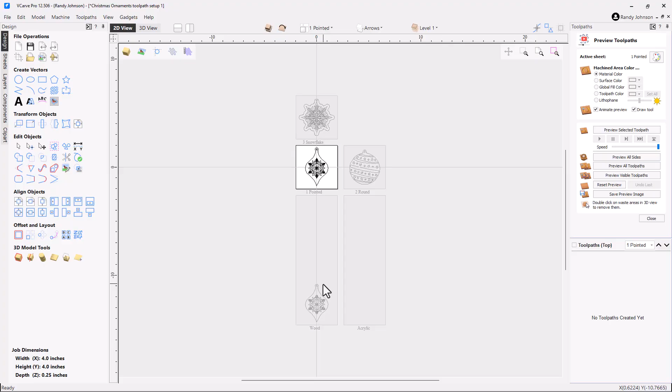Now I'm going to take and move this one to the top of the design area. I'm going to grab it, and over here in the move tool section, I'm going to use the absolute setting, the center of it, and move it up to a positive 4 inches in the Y direction, which will put it right there at the top and position it nicely.

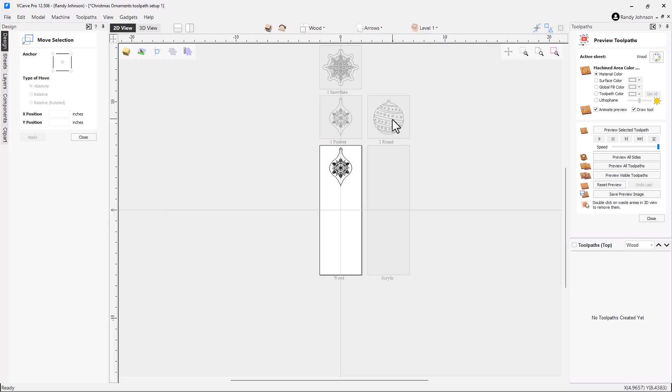I'll go to the round and basically do the same thing. Select it, right click, copy that to sheet wood, double click on the wood sheet to activate it, select that one, and let's move that up right to the middle.

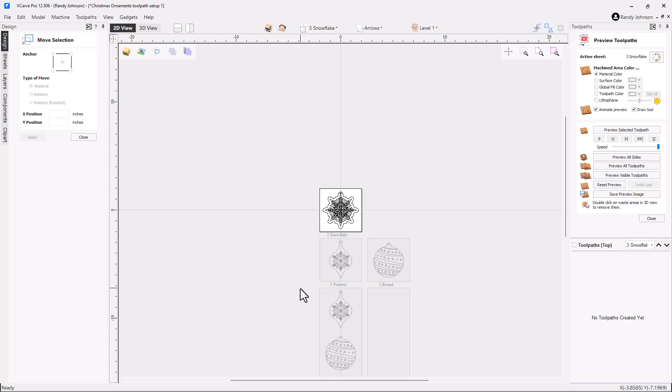0, 0 on that, and then the final one is the snowflake. We can again select it, copy to sheet wood, and now when we look here, we have all 3 of the ornaments lined up nicely on that new piece of material.

Close out of that. We're not going to need these 3 designs anymore. So I'm going to go to the sheet setup here, and let's activate the wood one by double clicking on it. That makes that active, and then we'll deselect and hide those 3.

Now the next thing, we're going to take and select those 3 ornaments, right click, copy those to sheet acrylic, and so we very quickly now have our design set up on our 2 sheets of material.

So the first thing we're going to do is set up on the V-carving, and then we've got to do a cutout as well as drill or route out a little hole here at the top.

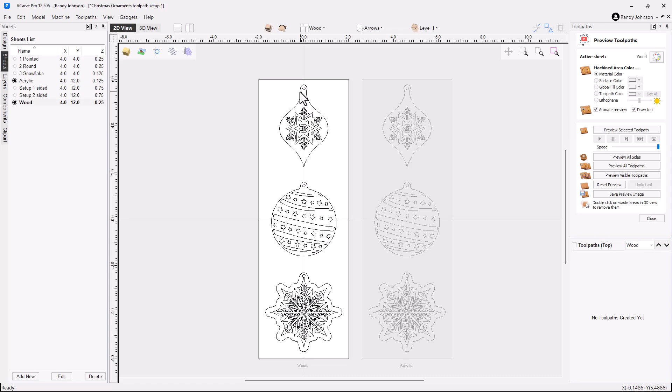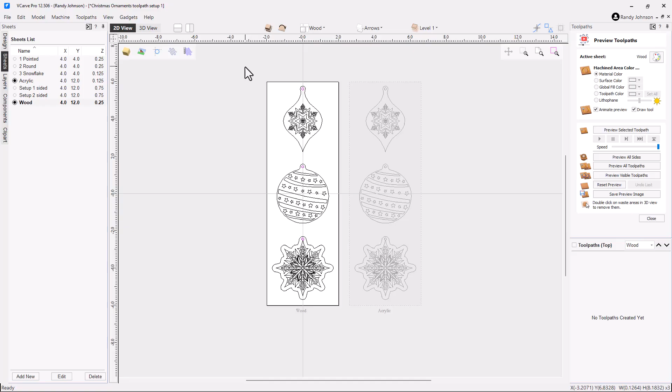So for that, I'm going to do a little bit of grouping first. I'm going to select the outsides like that, hit group, and then I'm going to select the little holes in the top for the hooks and group those as well. Then I could select everything and then just simply deselect those 2 groups, leaving me just with the VCarve designs that are left.

And then I can group those as well. The grouping just makes it easy when I start setting up my toolpaths. If I click on any part of the design, then everything is selected, and that way I don't leave anything behind.

So next up, we could go over to our toolpaths, and the first one we're going to set up, of course, will be the VCarve. So I'll go into VCarve, and go into my toolpath, get the bit that I want.

The bit I'm going to use for this is a 60-degree, but I'm cutting hardwood, so let's do this hardwood setup. That comes out to around 100 inches a minute on this, and 20,000, giving me a chip load of 0.005. It works out pretty well, so that one I found works well. If you have different settings you prefer, feel free to go with those. This is somewhat conservative - you could probably be more aggressive on the feed rate and maybe even pass depth, but I'm just setting these up as a moderate setting right now.

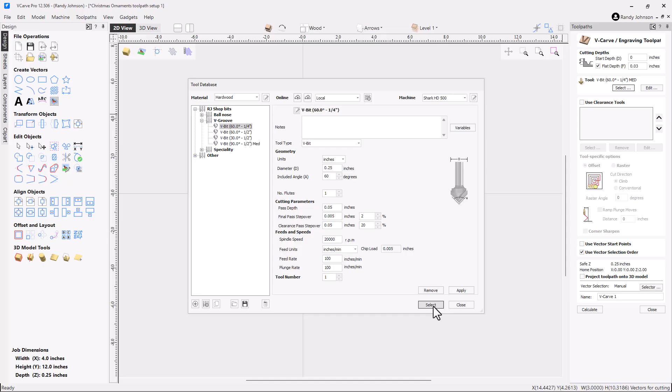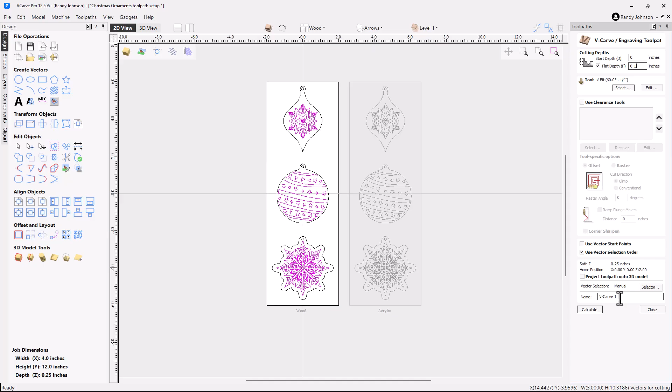So I'll select those. Now we see our V-bit listed there. Also, we're going to put a flat depth, and for the wood ornaments, we're going to go 1/10 of an inch deep, and we do not need a clearance bit on that. We'll go down through the bottom here. All the other settings are grayed out, so we won't use those. Let's set that up as a V-carve and click calculate.

Zoom in on that, and you can see it. Let's preview - and there's the design setup right there. Okay, so let's go back to the 2D view now.

And let's set up on the cutout. We'll do the hook hole next, so let's do the drilling toolpath on that. You could also route that hole out - that's another way that I do some of these, but the drilling toolpath works as well. Either one works. Cut this just a little below through the material.

We're going to 1/4 inch, so let's go 0.26. And then let's look here what I've got set up for 1/8 inch bits. Let's scroll up here. Okay, so let's go ahead and set this one up, copy this over.

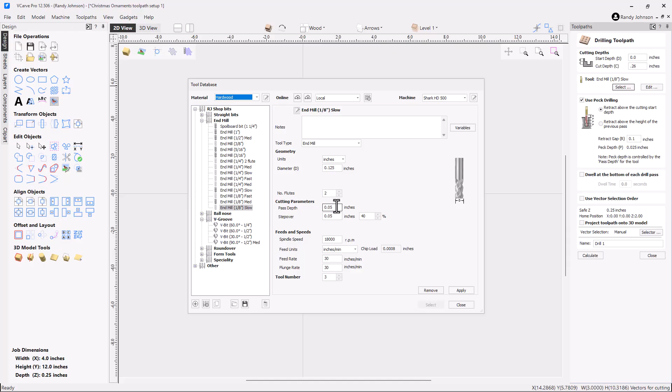I call this an end mill 1/8 inch slow, and that's because I'm using a slow feed to go down when I'm doing the drilling. The router speed looks fine, pass depth looks fine as well, so I'm going to apply that, select, and just check these other settings.

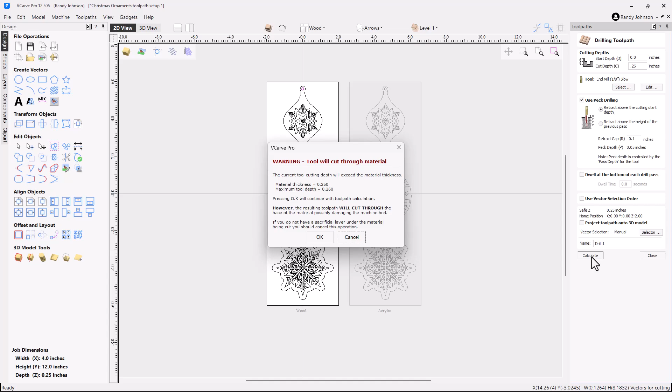We're going to retract above, use peck drilling, and we're going to come 1/10 of an inch above the material to get the chips out. Everything else looks fine here. So let's select our set of holes, hit calculate, and let's just preview that. That looks good. Next up, we'll take our profile toolpath.

Pretty straightforward - we'll select the outlines for all three of them. Now we're going to switch out, and let's go to our hardwood, and we want 1/8 inch fast. So let's set this one up for hardwood, copy this over and see how these settings look.

Okay, so let's actually take the medium. Let's see, okay, there we go - 100 inches a minute, 22,000. That looks good. Could probably slow this down to about 20,000 actually. Let's go with that. You can apply and select.

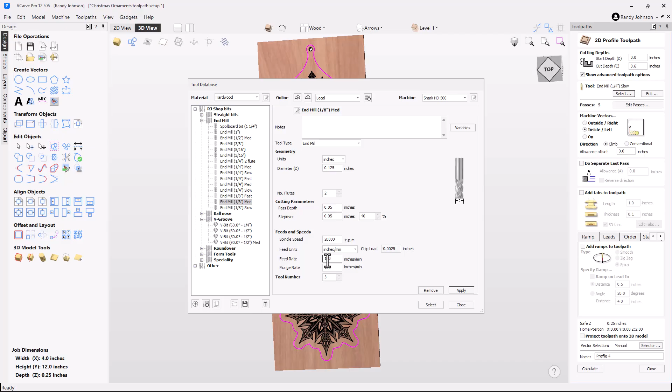Now, ranges in here on the spindle speed - you'll find that if you have the 2-horse spindle or even the 3-horse, using an 1/8 inch bit, cutting 0.05 deep, somewhere between 18 to 22,000 produces good results. And the feed rate, again, you could go anywhere from 80 to 180 inches a minute or even faster. On these small designs like this that are so tight on these corners and turns, especially the snowflake where it goes in and out, it's unlikely that the router or the feed will come up to the full feed speed anyway, because it has to slow down as it goes around those turns. So that's why I usually set it up somewhere kind of in the middle for a medium speed.

Put that just a little faster, apply, and select. Again, you might find you may be able to be a little more aggressive with your tool depending on your particular router bit and how you have your machine set up. But what I've shown there should get you going pretty well.

Now let's see the cut depth of this. We're going to go to 0.26 in the wood. Go to the outside, and let's add some tabs. Let's make this tab small, 1/4 of an inch, and 1/10 of an inch tall, 3D.

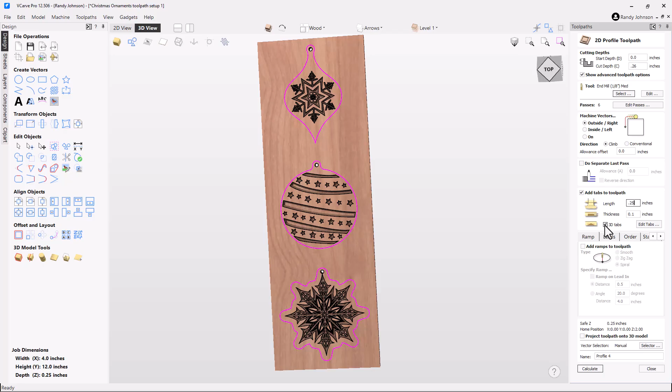That looks good. Let's edit the tabs - and we've got 4 tabs popping up. It kind of remembered from the last time I set it up, so that's convenient. I'll just stick with those 4 tabs on each of them. Close out of that. Let's add a little bit of ramp, smooth ramp.

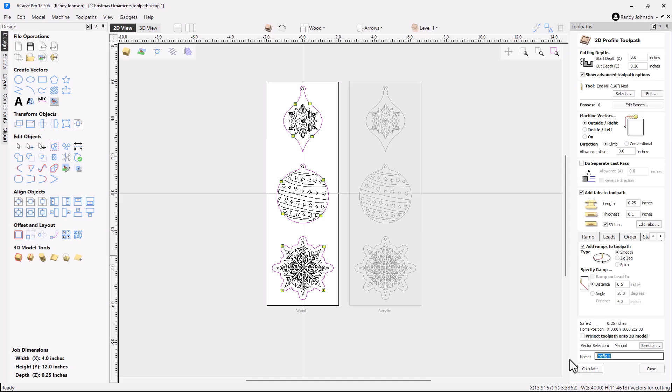That looks good. Just double check all these settings, and let's call this cutout. Calculate that - it's okay, preview that. And that does it for the wood ones. Now let's take and group these.

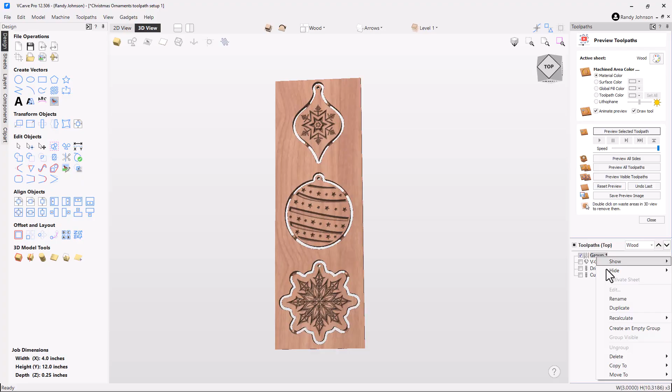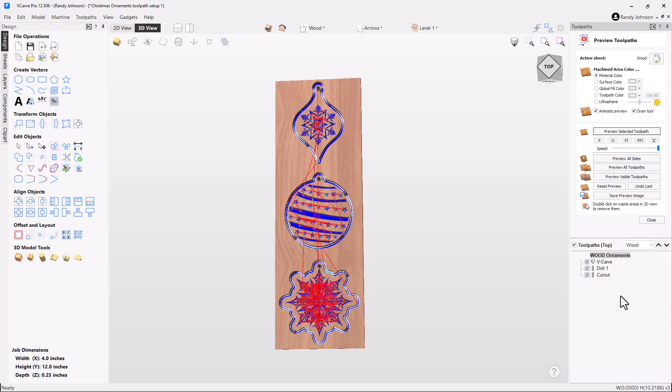Let me undo that a second and show you a trick. If I select all those, right click, group visible, it will do it automatically. Puts them all under a group. And then I'm going to rename that wood ornaments. So we have our toolpaths all set up for the wood ornaments.

Now let's go back to the 2D view a second. While we're doing all these toolpaths, let's do the acrylic ones next. If I double click on this, it'll open up. It's empty, but let's go back to the wood one. We spent some time setting all these up, so let's just right click and copy those to the acrylic setup.

Now we'll go into this one over here, and we can see everything about it's identical. So we're going to rename this acrylic ornaments. And then the V carving, it's red. All these are red because they're not associated with anything. But since we duplicated everything over, we should be able to do a quick association.

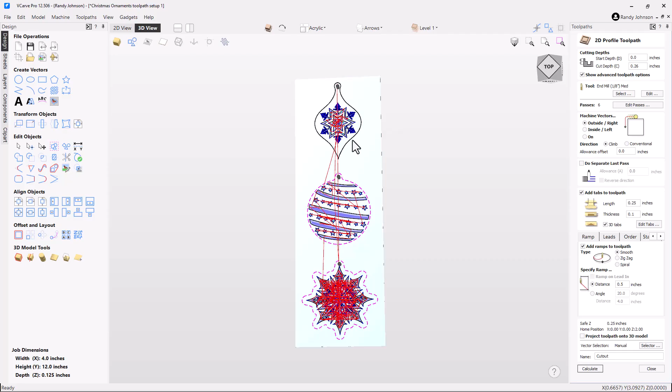I'm going to do the association first, just like, I guess these aren't grouped, so let's group those. Calculate. Drill. Hit the G key to group those. Calculate. And then the cutout, same thing. Now we're getting some warning messages, but I'm going to come back to that.

Our acrylic is only an 1/8 of an inch thick, and all these toolpaths were set up for the wood, which is thicker. So I just want to get everything associated, then I'll go back in, double click on the name here, and change the flat depth to 0.03. All we need to do is engrave fairly, actually let's make that 0.05, that'll work out just a little bit deeper.

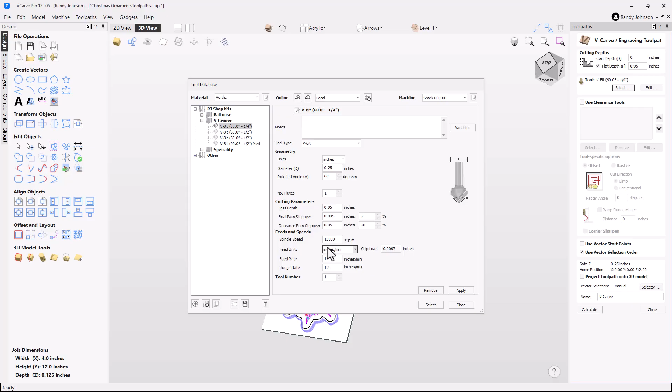I'm going to go back in here, and the speeds that I'd set up, you see it's under hardwood, and we can see the speed and feed down here on the settings. I'm going to change this out for acrylic. It'll still be the same bit, but you'll notice how I've slowed down my RPMs down a little bit. That's going to give a better chip load, keep the router bit a little cooler, and give a little better chip load in the plastic cutting. So let's apply that and select. Everything else looks good.

Calculate that out, and then we're going to go back to the drill. Here again, we need to make that drill a little shallower, so let's put that to 0.126. If we look in here, that's the hardwood settings, but actually if we go to acrylic, it's really the same settings, so either setup would work. Calculate that out, say OK.

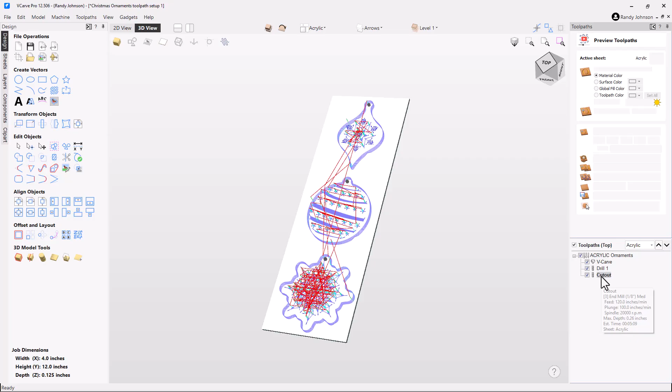On the cutout, we're going to do the same thing we've done. I'm going to go back in, let's get the cutout, we're going to use medium speed. Let's see if we got some settings here for acrylic. Again, they're fairly close to the same. Let me see how different they are. This is 20,000 RPMs that I use with the wood, and with acrylic I'm slowing it down a little further to 18,000 for a little better chip load, to keep the bit a little cooler.

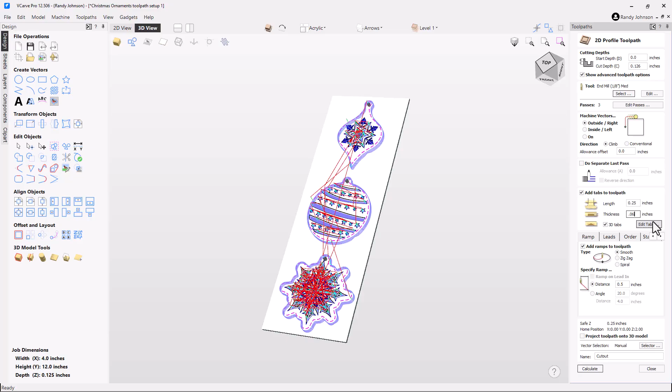Let's select that and go back up underneath the cutting depth, and type in 0.126. For tabs, let's make the thickness of this tab a 1/16 of an inch thick. Well, let's round that up to 7, that'll be fine. And then edit the tabs, we have the 4 tabs, that looks good. And the ramping, same ramping, a 1/2 inch for that cutout, and calculate.

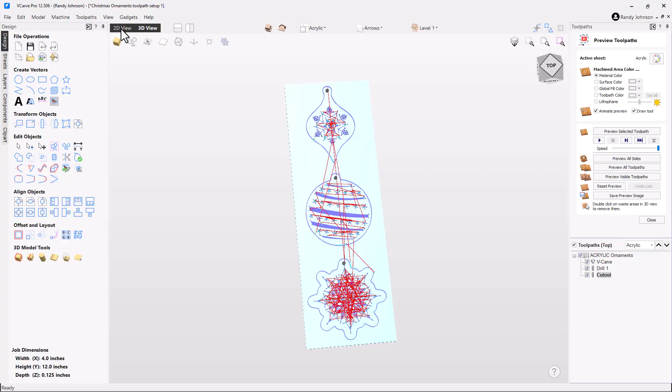So there, we have toolpaths now set up for each of those. That goes pretty fast, setting those up. Next, we have to set up our table and some registration pins to register these pieces. We're only doing one-sided on these, but I like to use pins. You could just clamp or glue or however you hold your material down to your table.

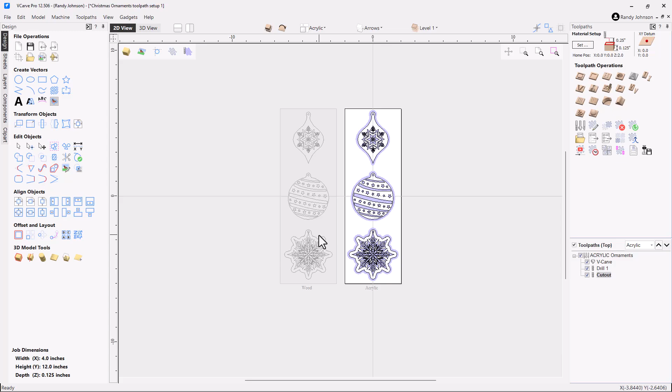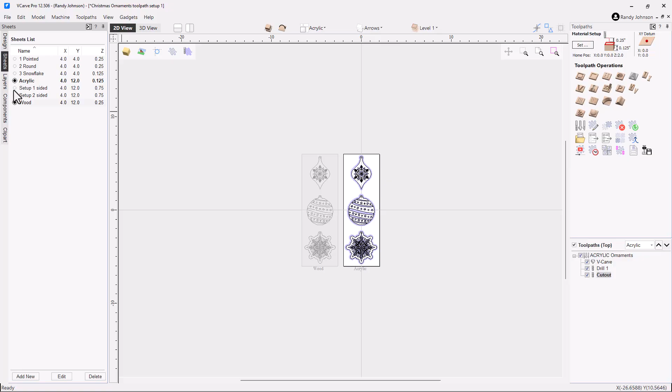You can see how the datum position is set up for the middle. You could just zero your bits out over that middle and cut the parts. But because I'm doing multiples of these, I want to have the table set up so I can just swap one piece out, doing several of them during one day's worth of work on these. So let's go back and open up a sheet here, and take a look at the setup, single-sided.

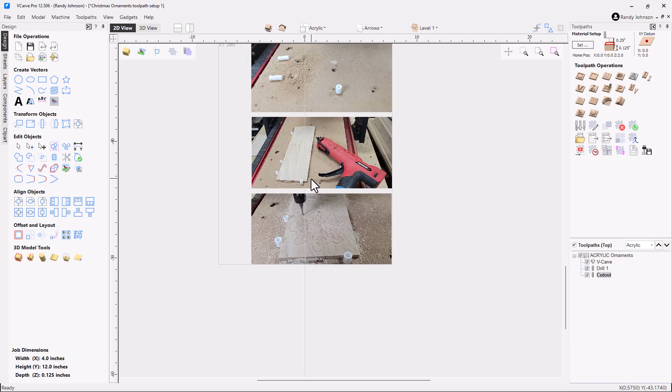Now, to position these registration pins on the table so that the center of our datum, or XY 0 point, on our material ends up right there in the middle, there's a couple things to consider. You could pick a spot on the table and just run the pin toolpath after we set that up and put everything there. Or if you want to be a little bit more exact about it, this is what I recommend people consider.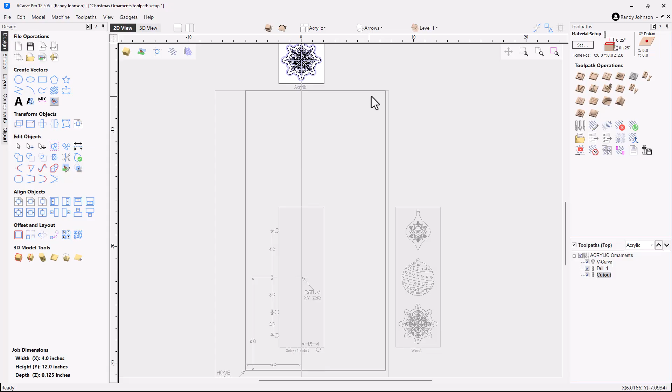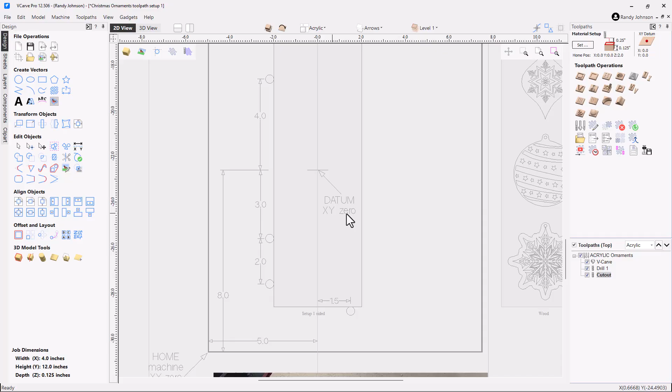This dark gray outline around the outside here represents the table on an HD 500 machine. It's about 12 inches wide by 24 inches deep. Your machine may vary depending on which model or machine you have. But what I'm doing is I'm homing the machine down to the lower left, and after homing it, I'm then moving it over 5 inches in the X and back 8 inches in the Y, so the router bit and the router are centered over this area. And then I'm re-zeroing the XY, so this becomes my datum or XY0 for my project.

Having set that up, that's where I'm then taking and bringing my material onto the table. I bring my router bit over this area, slide the material up there, and it all lines up based on where those holes are. The initial setup, as I was mentioning, is you're going to bring it over 5, back 8, which will put it right over here, zero it out, and then you'll run the pinhole toolpaths, like you see right here, put the pins in, and having done that, the center of your material automatically lines up to that datum location.

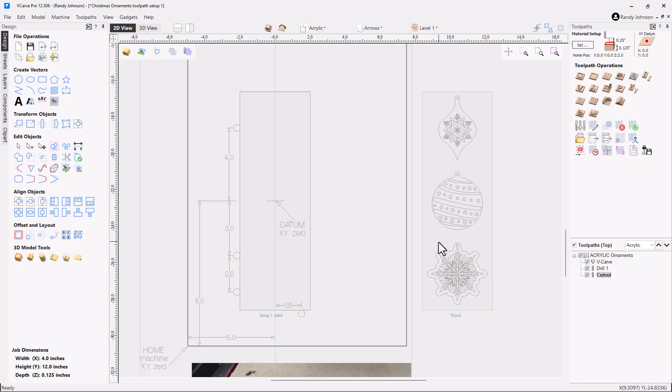So let's take a look a bit at setting up these pins. You can see how I've got measurements located. Let's go back to the wood design over here, activate that, and the pins are 3/8 of an inch diameter. So I'm just going to place a pin here, here, here, and one over there.

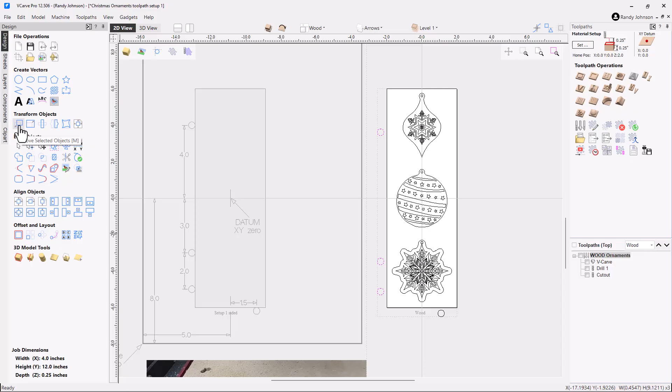And then I'll use the alignment tools to get everything set up. So first, I'm going to select all of them, center them left and right horizontally, so they're aligned in that direction. Then I'm going to go in and move the right edge, which I want to align with my material, to -2 inches, just like this. Hit apply, and that moves them right along the material.

And then this lower one would be -6 inches in the Y, like that. Actually, let's do the top edge of it, -6. There, we can see how that is.

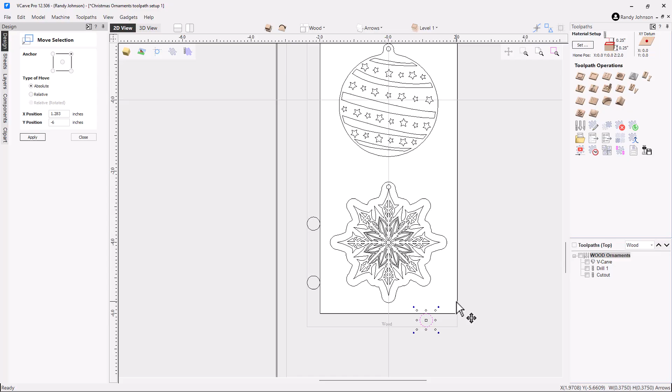Next, I'm going to use these measurements I've laid out over here. So this one, the center of it, is 1.5 inches off of the center of the project material. So that would be 1.5. That moves that into position.

And then here, these measurements are coming down from the datum point. So this one right here would be 3 inches down, so let's go at -3. And then this one is an additional 2, so that would actually be -5.

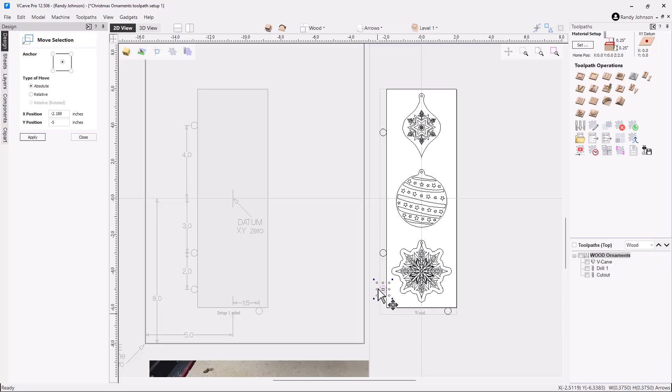That positions it. Again, it's not critical, the vertical positioning of these, but it is critical they be aligned right along the edge of the material. But if this is up or down a little bit, if this lower one is left or right, that'll still work out. Let's go and take that one and move that. That's 4 inches up, so that's a 4-inch positive direction in the Y. And we now have our 4 pins lined up.

Now I'm going to take, again, just group these for convenience, and let's group them like that. Now, if I go back over and activate this setup, this sheet here, I already have some registration holes that I've set up. I could use those, or I could do the same. Since they're in a group like this, I could select the top and copy those to the wood sheet. And then we could go back over to this one.

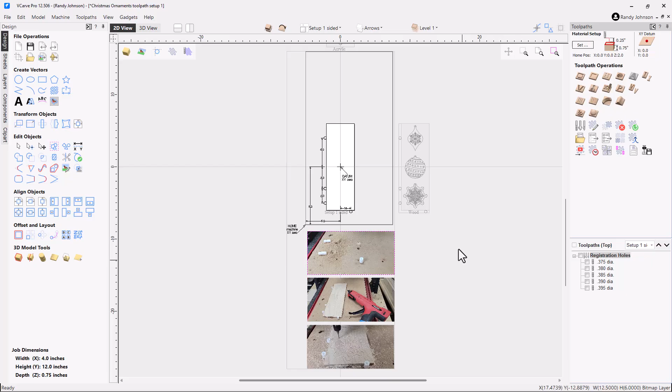And again, they're disassociated with any circles, but that is easy enough to do. So again, let's open this one up first.

Now for this, I'm using a 1/4-inch end mill. I call it slow because if we look at the settings, I'm going at 30 inches on the plunge rate and the feed rate, and a fairly slow spindle speed on this. Because slowing it down reduces the chances of burning on that little hole. If you go with a really fast feed rate and plunge rate, it tends to act too much like a sewing machine or a fast drill press, and it doesn't do as nice a job when it drills or cuts that way. So slowing it down helps.

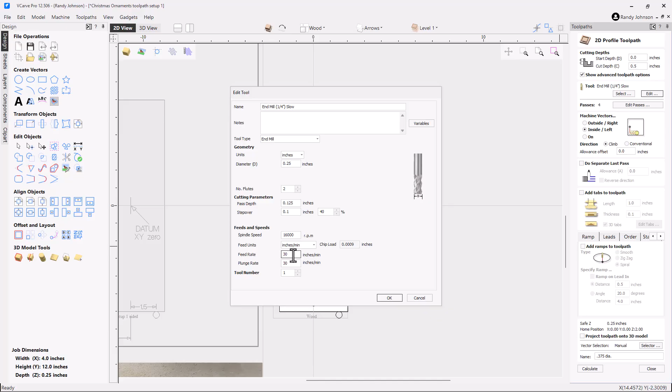Say okay on that. And let's select our holes here. Let's go just a little over 1/2 inch deep on these. We're going to go on the inside. The rest of these we don't need. I'm not going to do a ramp since I'm going into MDF.

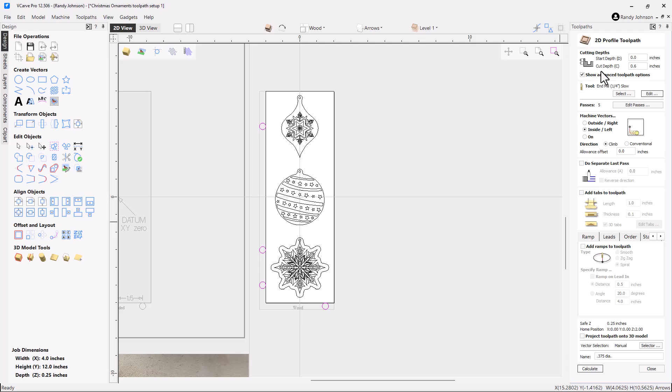And so this will cut. It's warning me that I'm going to go deep because my material is only 1/4 inch thick, but that's okay because I'll actually be cutting the spoil board. So that's set up like that.

Now, here's one of the interesting things. If I quickly grab this one and open this up, notice how these vectors are already selected. So if I like my settings up here, which I do, I'm just going to hit calculate, say OK, and click down this list. Automatic selects those vectors that were used before, and go on down.

Now, using the same router bit for all of these, all the same settings, but you can see the diameter is different. I'm using the same vector - all these vectors are 3/8 of an inch diameter. But I made little adjustments in these tool paths, and I'll show you those in just a minute. Notice how this one cuts right out to the vector line, right out to the vector. This one cuts a little bit bigger, a little bigger, a little bigger, a little bigger.

Now, I've mentioned this in some of the other videos I've done, but when I'm working with a fresh setup, maybe a different router bit or a different machine, I like to set up a range of holes and find the one that fits best with my pin. Once you're set up with a pin material, whether it's plastic, wood, aluminum, or whatever you're using, and a router bit on your machine, you'll probably figure out that one of these is the right size, and then you can just use that all the time.

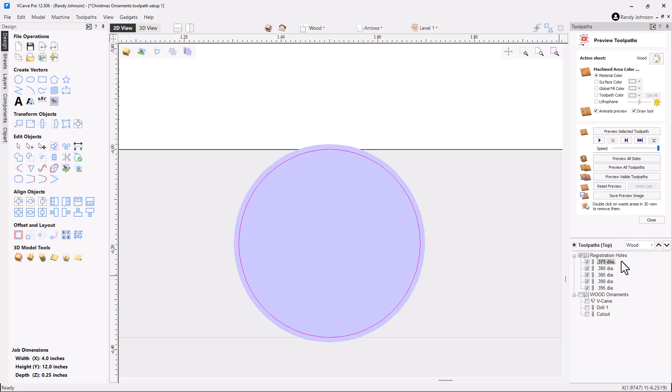But I switch between machines. I try out different bits - straight bits, spiral bits, different kinds of cutting configurations. And sometimes there's a slight difference. I've worked on some machines where router bits and different materials cut a little differently also. Sometimes the 375 works out, and sometimes I have to go all the way up to the 395 to get my pin to fit in the hole. So I just like to create all of these in one setup, and then I cut the smallest one first, try the pin, and I have all these available at my machine, so I don't have to go back to VCarve and try it again.

Now, to achieve this, let's go to this one right here. I added a negative allowance. Since I'm cutting on the inside, a negative allowance pushes the router cutting to the outside of the line. This looks like a very small amount - it is, about half the thickness of a piece of paper. But remember, that's both on the right side and the left side, so together that's adding 0.005. Thus, if you look at the bottom here, 0.005 plus 0.375, we come up with 0.38. So that increases the overall diameter by about the thickness of a piece of paper, and that works out fine.

And then each one of these, I incrementally increase that by about half the thickness, 0.0025, I added to that each time.

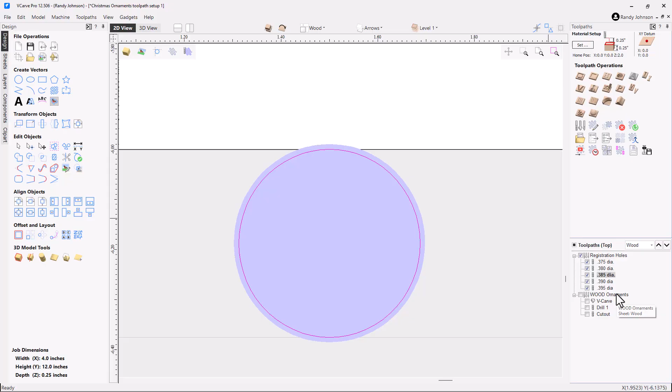And then that ended up increasing it incrementally like that, giving me that range. Okay, so we've got that set up. Now let's bring up our acrylic. Let's see our acrylic, and let's turn off this setup here. So we've got these two settings now.

Now we really only need to run these registration holes once, so let's take a look at those one more time. You're gonna cut those in the table and insert your pins. For this setup, this is 1/4 inch PEX plumbing pipe, a supply line for sinks and toilets. It's very consistent in diameter, with a 1/4 inch inside dimension and 3/8 inch outside dimension. Being plastic, it's easy to cut, easy to work with, inexpensive, and if your router bit hits it, it's not a problem. So that's what I'm using. But if you have wood dowels or other types of setup, you can modify the diameter of your holes accordingly.

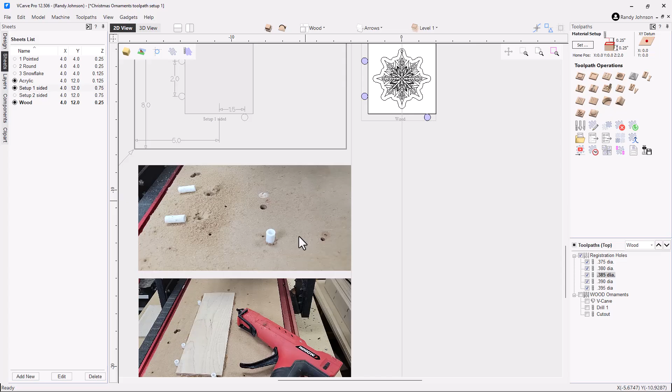Okay, so now let's go back and turn that off for a minute. Okay, we're now ready to save these toolpaths to our USB drive or to the computer or wherever you save your tap files. So I'm going to select the registration holes first and then click Save.

And I'm going to use this third option here, which is all visible toolpaths to multiple files. And I don't want to group these because I want to be able to cut these all individually. And I can leave that unchecked as well.

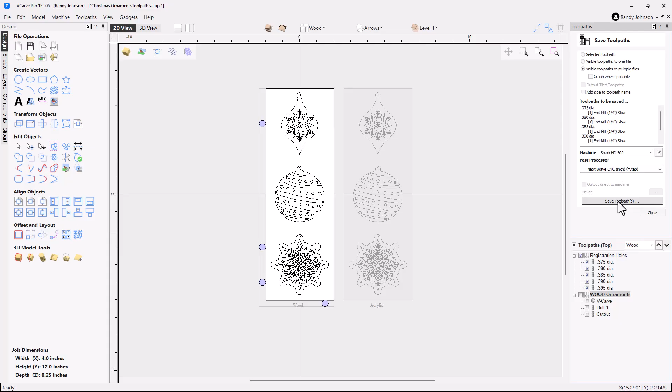Click Save. And then I'm going to change the default name to CO for Christmas ornaments, and then type in RG holes for registration holes. Click Save on that, and let's just go take a look at it again. Hit Save again, and there you can see the 5 toolpaths that were just saved. So it's the registration holes, and they're in the order that we want to cut them in, from smallest to largest. Cancel out of that for now.

And then we could go down to ornaments. In this case, these last two ones, because the drill and the cutout use the same router bit, we could go ahead and group where possible. So in this case, I will group those.

Click Save. And then let's hit, again, just type in CO for Christmas ornaments. Save it. Let's go back and take a look at that. And there you can see we have the V-carve set aside by itself, and then those at the bottom. Now it says drill because it picks up the name of the first of the two, but we could go back in if you wanted to say drill. We could actually rename that drill and cutout like that. And let's cancel out of that.

And if you want to take a peek to see if it actually worked, you can see there that it did actually save that name. Now we want to make sure and cancel because we don't want to save over that. Let's cancel out of that.

So those are set up, and now we can do the same thing with the acrylic. Highlight the acrylic, and in this case, again, I'm going to select all of these and use the same settings I had above. Let's click Save, simply type in CO for the prefix on that, and hit Save on that. Take a look at it again. And there we are. We've got our 2 acrylic ones and our 2 wood ornament ones, and then our registration holes. So with that thumb drive, you could go to your machine and do all the cutting, all the setup you need with that group of toolpaths.

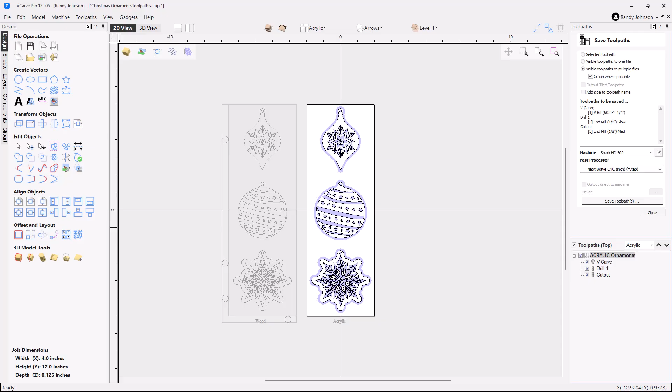Okay, with that done, let's go ahead and take a look at what it's going to take to do these as 2-sided setups. For that, I've already prepped up a sheet here. Let's take a look at 2-sided setup right here, and let's temporarily turn off the acrylic because we're not going to do 2-sided cutting with the acrylic. We'll just be doing 2-sided cutting with the wood. So we'll activate that and hide the acrylic.

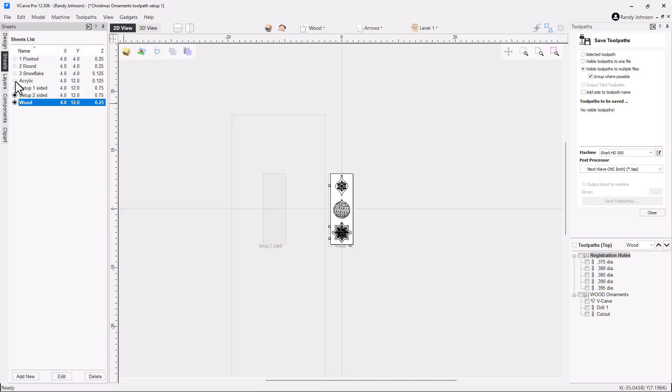We could actually do something a little different. Let's take this wood and duplicate this. And on this one, let's rename it and put that one as one-sided. And then this one, let's rename it and call it 2-sided. And let's turn off the 1-sided setup.

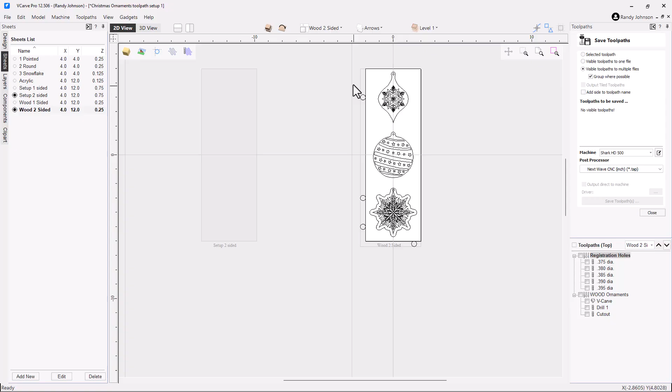And now the 2-sided setup, we're going to be using a different arrangement of pegs or registration pins. So these we won't need, so let's delete those. And also the peg setup is going to be done on the back. But let's do a couple things before we go to the back side. I want to carve that design and that design to the back side, so let's copy those to the other side.

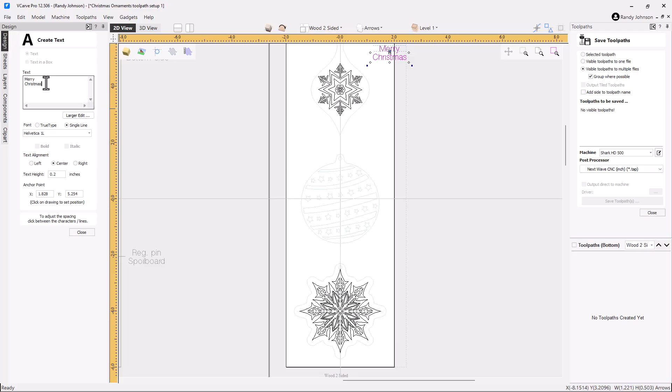This ornament, I'm going to do something different at the back side, but let's take a look at the back side next. And you can see how we can see through from the other side right there. I'm going to add a little text to the back of this. Let's just go with Merry Christmas, and let's move that text down here, and let's get a typeface for that.

There we go, let's use that. Let's make it bold, and let's increase that a little bit, and then let's just center that like that. So we're going to carve that to the back of this particular ornament. The others, we're just going to duplicate the other side.

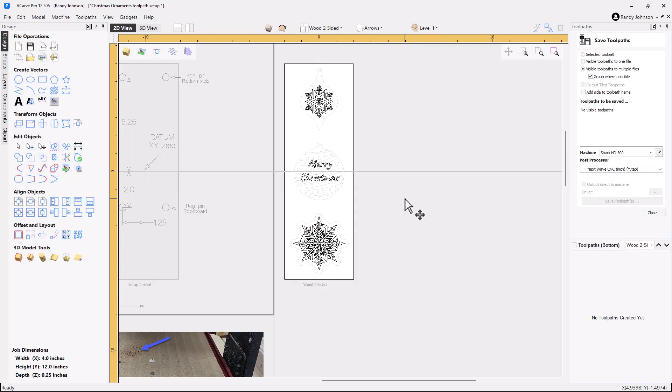So with that done, let's look at the tool paths a bit also. Let's go back to the first side, we'll look at these tool paths. Now those registration holes, we'll make use of those in a little bit.

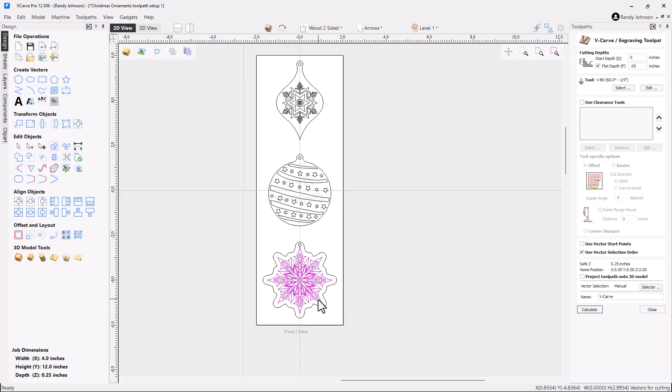But let's take a look at the V-carving. Since we're cutting from both sides, let's reduce the depth of cut on this to 0.05, make it a little shallower on both sides. And hit calculate on, I'm going to select our vectors like that. Calculate.

And then the drill, that still works, as does the cutout, so there's nothing we have to change. But let's just preview those, see how those look. And those look fine.

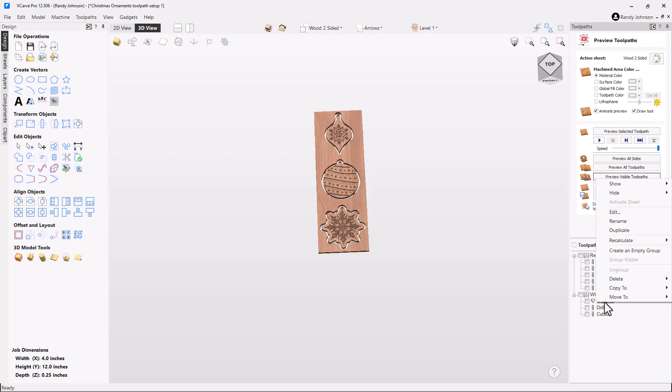Now the V-carving one, we want to copy that to the back side, so we'll take copy to other side. And let's flip it over. And again, let's associate it with, let's just select all of those. Hit the G to group those, open this up, select them, and calculate.

Preview those out, and there you can see what it's looking like now on the back side. Now we can see that we've got the front side and we've got the back side, or the bottom side.

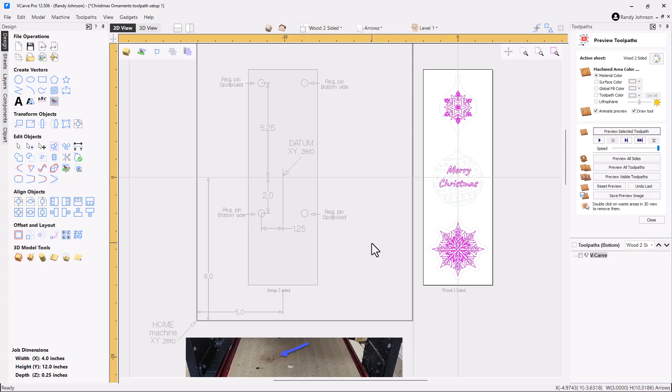Now the doweling or the registration holes that we want to set up, which I have specified over here, we'll look at that in a minute. I'm going to do everything from the bottom side. It's going to save me a tool bit change, and it just makes it a little bit more efficient on the setup. So I'm going to highlight this.

Let's get this one open. Here we go, so we got some photos to look at here. So first off, I have registration pin holes that are going to go in the spoil board, and I have registration pin holes that are going to go in the bottom side of the project board. And those are a mirror image of each other.

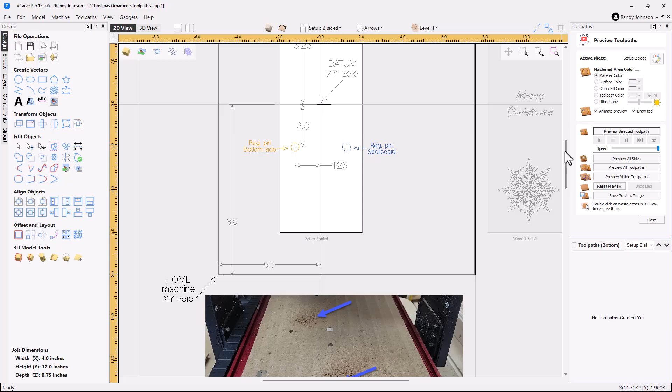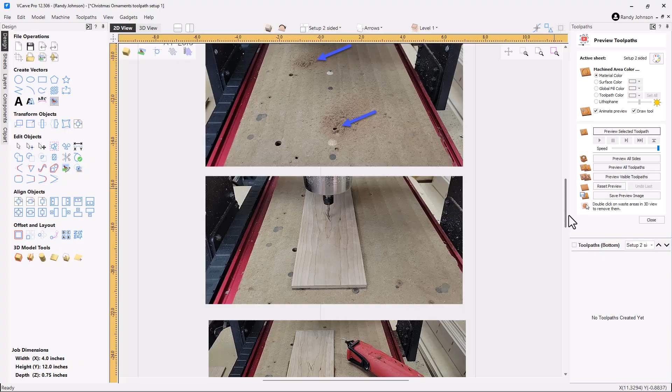And here you can see down here, those are the ones going in the spoil board. And then we're going to put our, just like we did before, we did the same offset of 5 inches and 8 inches to find our datum point. So I'm going to go ahead and bring my bit over to that location and zero out the bit to my datum point, which I would have done that before I cut those holes.

But then I'm going to bring my bit back to the middle, slide my board under there, and that gives me a relative location for where my board is going to go. Again, because I've got waste material around here, it doesn't have to be super precise. If I'm off by a 1/16th of an inch, it'll still work.

But also, these are my old holes from my other pegs. I'm actually using those to kind of line up the side. But if you do the router bit just like you see here, and if you measure from the side of your spoil board over the necessary amount just to get that parallel, it'll work out. Because once the dowel holes are drilled, the alignment of this piece, as long as it's close, the alignment is dependent on the dowel holes, not the perfectly centered project board.

And in this case, then I drill the holes in the deck first in the spoil board. Then I'm going to center my board. I'm going to mount the board, again with hot melt glue in this case. And then I'm drilling dowel holes or registration holes in the bottom side.

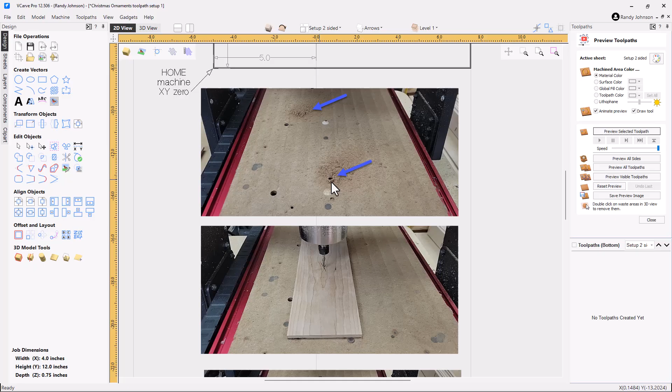Now notice that this is the top right and bottom left, where in the spoil board, it's bottom right and top left, which lines up with what we see here. So these orange ones are going in the project board, the blue ones are going in the spoil board.

And again, the reason I do it this way is I put a 1/4 inch bit in, I find my datum location, I cut these holes first, I put my project board on, glue it down, route those holes since my 1/4 inch bit is in the material, and then I go back and run the tool paths for the bottom side of my design.

So there you can see here, I just put the year on the back of it for this one, and I engraved the top and the bottom ones. And again, they're engraved a little shallower than I did for the one-sided design.

Then I pull that off the board and put the pins in the table, the two holes that we cut at the very beginning. Notice how this top one, which is top right, is going to flip over on top of that one. Instead of having mounted that board with the pins and glued it back down, I can then do the machining on the front side.

And those pin alignments guarantee that at the flip it's a true mirror image. So we'll look at how we lay that out to do that. It's a pretty straightforward process. If you've not done this before, this is a pretty good project to practice on. And if you have done it, you're aware that it's surprisingly precise if you get those dowels set up correctly in your VCarve file, the vectors.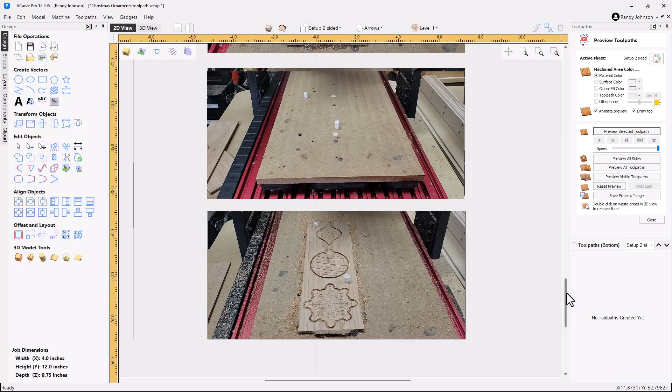So let's go back up to the top here, and using these dimensions, we're going to lay out the pins over on this side. So again, it's 3/8 or 0.375 diameter holes. I've got it set up at 3/8 of an inch already, so I'm just going to go over to my design over here for now and just snap a couple of locations.

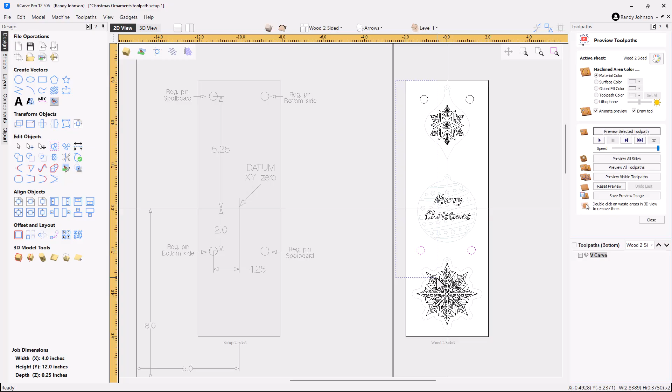You can see how it's lighting up around my objects over there. Having done that, I can then go in and use my alignment tools to align those like that. Just try to get these aligned in the Y direction and then line those up in the X direction. And then I can take these as pairs.

And you see it's 1.25 inches off from the datum. So let's open up our move. We want that to be a negative 1.25 off from the datum from the middle there. So we can apply like that.

Select those two, that's a positive 1.25. And then these top ones are 5.25 up. So I'll select those as a pair and change that to 5.25, and that'll move those up so that those are 5.25 above the datum line right there.

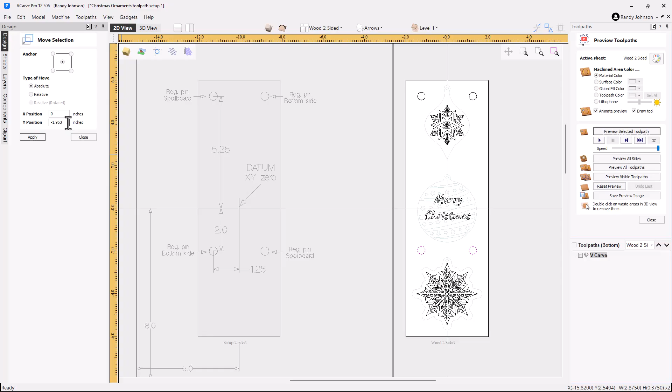And then these bottoms, as you can see here, are 2 inches below the datum line, so this should be a -2, like that. So now they are mirrored left and right, which is the most important thing, and they are mirrored off of the center line. And then horizontally, they're also equally measured off of the datum in the Y direction. So we've got our 4 holes set up.

So we got those matching over there. Next, let's go back to the front side, and we have our registration holes already set up here. So let's take and move those to the other side because we don't need those on the front side of the project for this setup. We only need those V-carving tool paths.

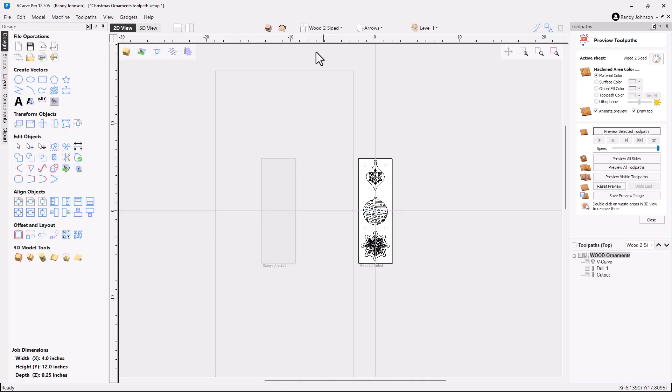Now let's flip back over, and now we can associate these. So I'm going to select, and then I'm also going to duplicate these like this. And these I'm going to rename table.

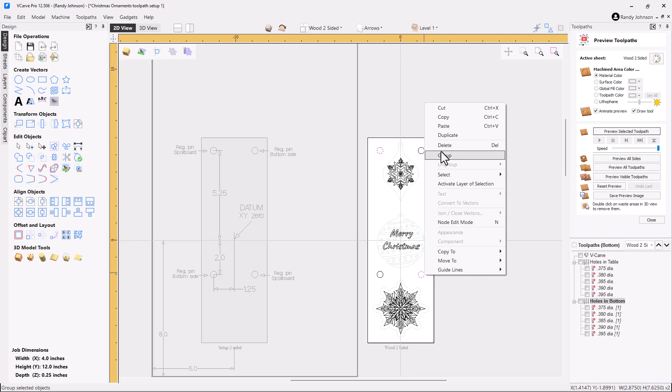Okay, so just to keep things straight, we're going to do the holes in the table, the holes in the spoilboard first. So these would be these two. Let's select those and then group those. Open this one up, it's active. Now in this case, we do want to go that deep since we're going into the spoilboard. So hit calculate, say OK, and we'll just keep doing that for all of these.

Again, as I mentioned earlier, once you find the size that works well for your particular bit and your particular material and your machine, then you could probably focus in on selecting which of these is the one you need, so you don't actually have to save all of them.

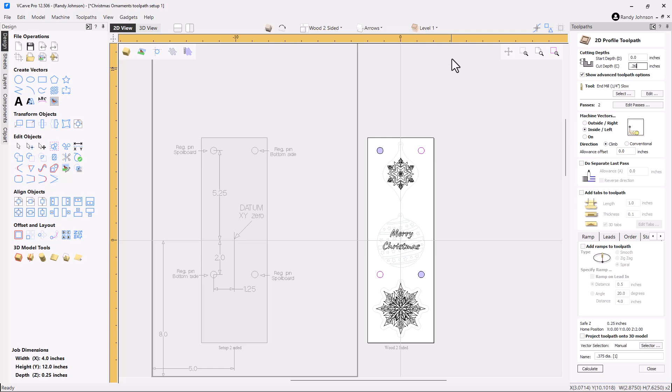Okay, with that done, then let's select the other two, which are going at our bottom board. So let's group those as well, and let's open that one up. Now in this case, we want to change that depth, just the thickness of the material plus a little, so we'll go 0.26. Calculate. Open this one up.

Again, it's going to be those two that we're going to be cutting. Change that to 0.26, and we'll just do that for all of these.

Goes pretty quick because those holes are all pre-selected. Okay, let's go back to 2D view a minute. So we have those set up. We've got our V-carve set up. Now our V-carve, let's shrink these up here. Our V-carve is going to be cut after we cut the holes, so let's just move that down the list right there.

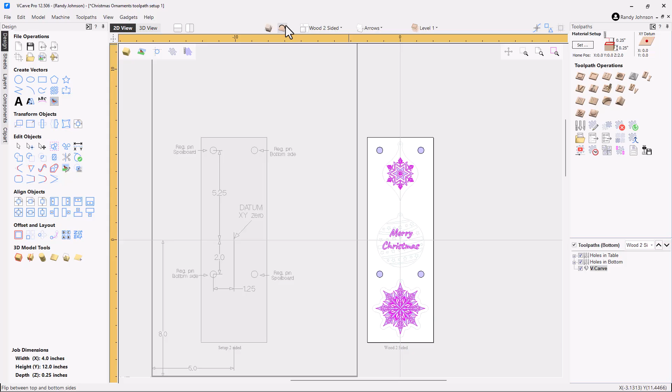Let's just double check our V-carve. We're doing a fairly shallow flat depth on that. Okay, that looks good. Let's go back over to the top a minute. Let's double check our V-carve on this one. Again, 0.05 on the depth on that.

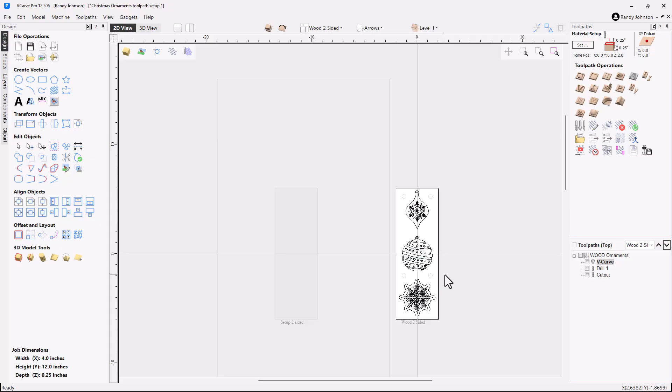And the drilling, again, we can also look here. You can see it goes 0.26 on the maximum depth, and the cutout is 0.26 on the maximum depth as well. So that looks good. So now we've got those files all saved or created, so now we can go to save them.

Now again, you're going to cut the bottom side first because that way we're actually not cutting the project out yet. It'll leave the most material there for the cutout on the other side.

Now we can start saving the files. We're going to save them starting at the bottom here first because we want to cut our holes, our registration holes first. So I'm going to highlight that group of toolpaths and then click Save. And I'm going to use that option again, multiple files, but I don't want to group them. And I'm not going to add a side name at this point. I'm just going to leave both those unchecked. I'm going to click Save.

And in this case, I'm simply going to go CO again for the project, and I'm going to go holes in spoil board. That'll just differentiate that from the other ones. Click Save. And then I'm going to go down to this group and do the same thing.

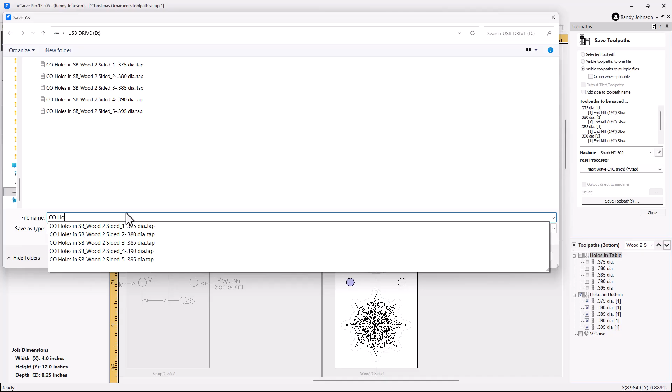And I use a similar name, but I'm going to go CO holes in bottom, like that. And then this final one, the V-carving one right here, I can click on Save, and I'm going to go, let's call this CO bottom, and let's delete that part of it.

And let's take a look at how those saved. So there we have the V-carving toolpath for the bottom two-sided. So the two-sided, that name is referring to the wood two-sided, is referring to the sheet name right there. So that's why it's a little longer than before. So it's Christmas ornaments, bottom side, sheet name is wood two-sided.

It's the first one we're going to cut in the V-carving setup. And then we also have our ones that we're going to cut in the bottom of the project and the ones we're going to cut in the spoil board.

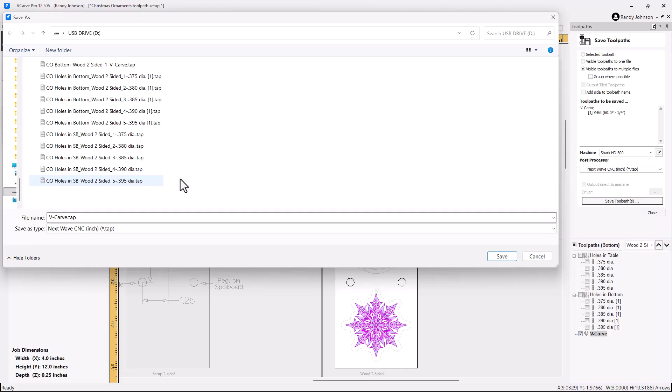Next up, let's go ahead and flip back over to the top side. And here we could select it like that. We're going to save all those, and we could group where possible, so it'll group those latter two. And we got the V-carve.

Now notice we still have the V-carve bit in the tool when we flip it over, so that actually saves us a tool change. Plus we already have the holes drilled in the top, so we've saved a bit change on this.

So let's save this out. And then let's call this CO, and let's just put the name of the side right away, right there. Top. And let's take a look at that again.

So there, now we've got our top side, and then all the other ones we're working on are on the bottom side. Spoil board for those, and then the bottom parts for those. So that's all the tool paths then that you can take over and cut all the parts.

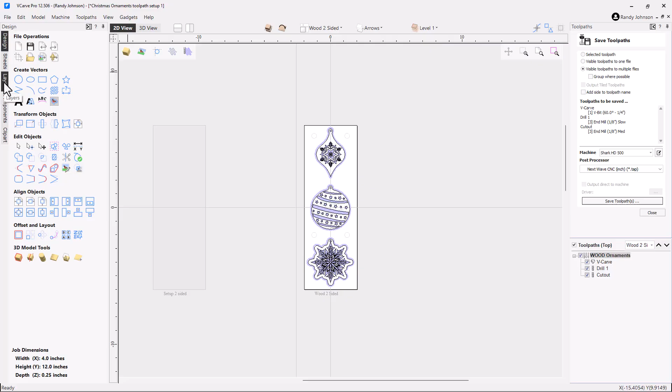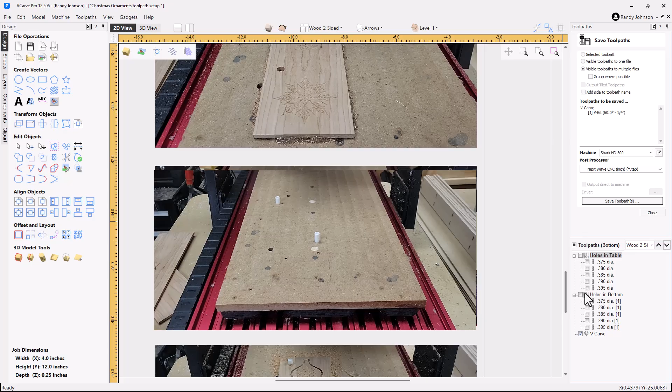So let's just go back and look at the photos here a second. Look at the layer, go back to the back side here, and you again can see how having glued it down, cutting those peg holes for the registration holes at the bottom, and then carving out the design on the back side, taking it off, putting the registration pins in, flipping the board over, and then cutting the top side.

So with that, then you can take the project off the material or off the table and separate the parts, and you have a two-sided ornament.